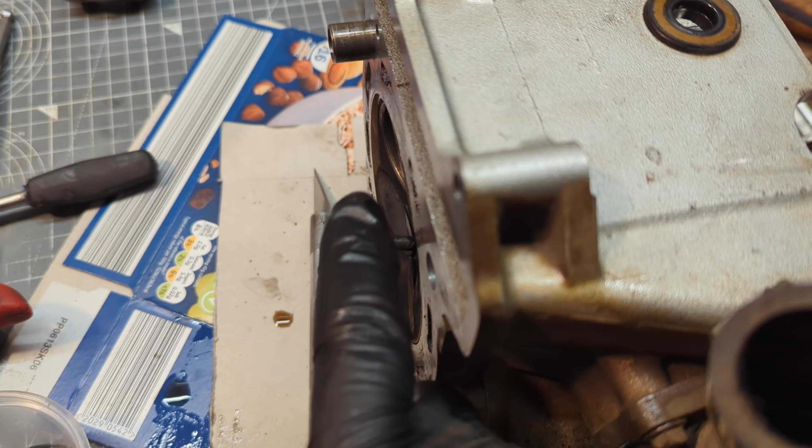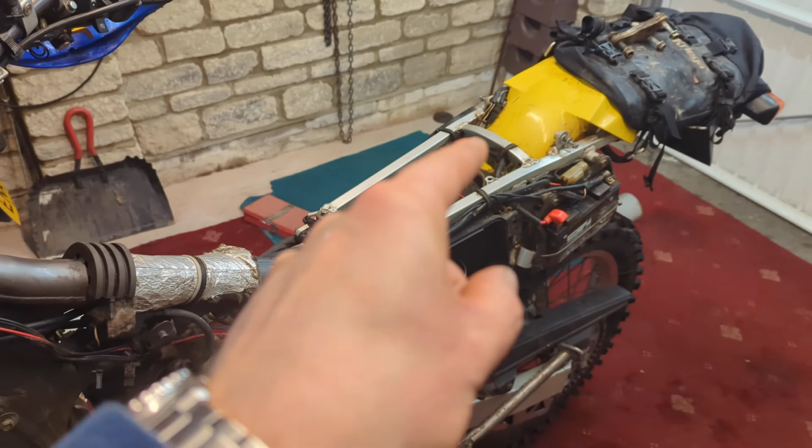I've started to be able to get at the engine. I'll give you a quick show of what I've done. There used to be a seat there, you take that off. There used to be a fuel tank there, you take that off. There used to be a carburettor there, you take that out. You disconnect the throttle cables on the other side.

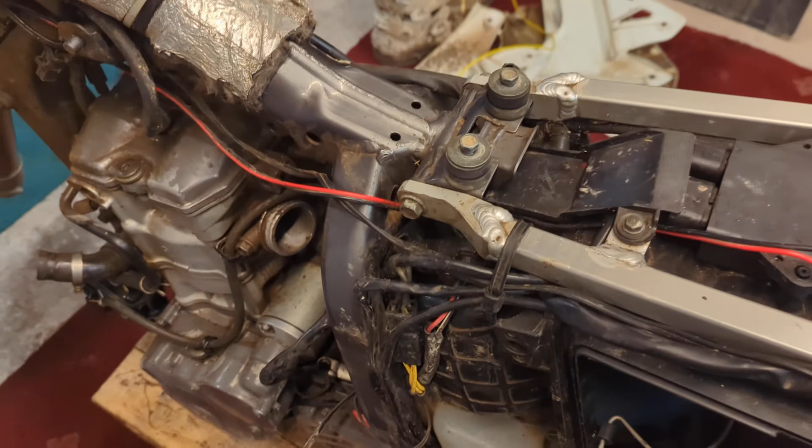There used to be an engine mount here, here and here, and the same the other side. You take that out, and then that goes there. I stamped it with a metal stamp so I know which side is left and which is right. You disconnect a few jobbies, the electrical connectors, the radiator lived there and also there.

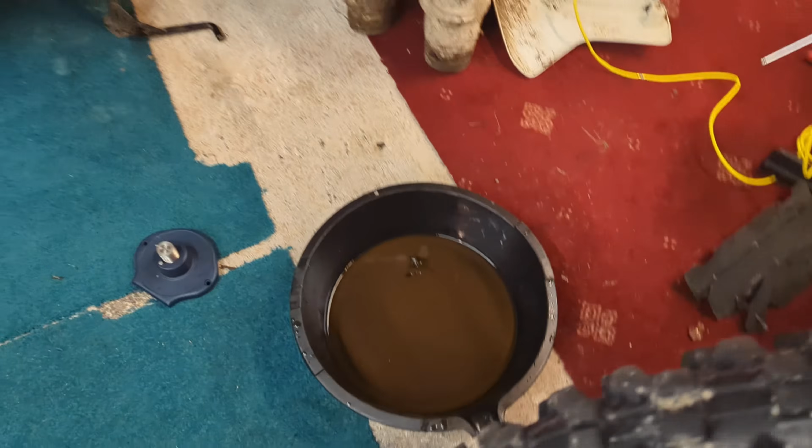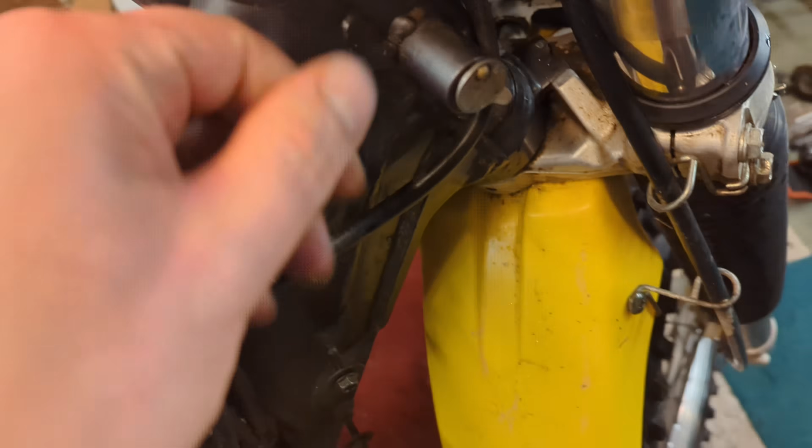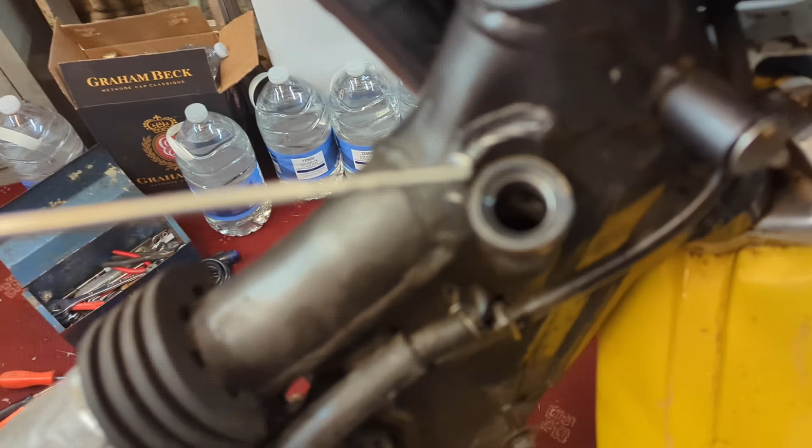First point of concern is that very little coolant came out. I know there are only baby radiators, but that is not much coolant. And then I had a look inside here. This is the oil cap. I know you don't get oil level until it's run up to temperature, but yeah, okay. That looks to me like mayonnaise. I wonder whether it was an enormously catastrophic head gasket.

Just a quick interjection while I'm editing this video. One, there was the right amount of coolant in there. It's only a small pair of radiators and a small amount of space in the engine for coolant, so it was nothing to do with catastrophic head gasket failure. The condensation inside the dipstick tube, again, nothing to worry about. It had been extremely cold and very damp weather, and it's just a symptom of inconstant use and a bit of condensation inside the dipstick tube mixing with a bit of oil vapour.

As I started taking the engine apart, as you'll see with the superimposed photos, it became clear exactly what had happened. It's a really common issue with that DRZ400, particularly that early engine and that automatic cam chain tensioner. The whole story of me fixing it leads up to me rebuilding the top end of the engine and installing a manual cam chain tensioner. So that was very quickly what we found to be the issue, but I was very happy to have a couple of older, more experienced friends to help me.

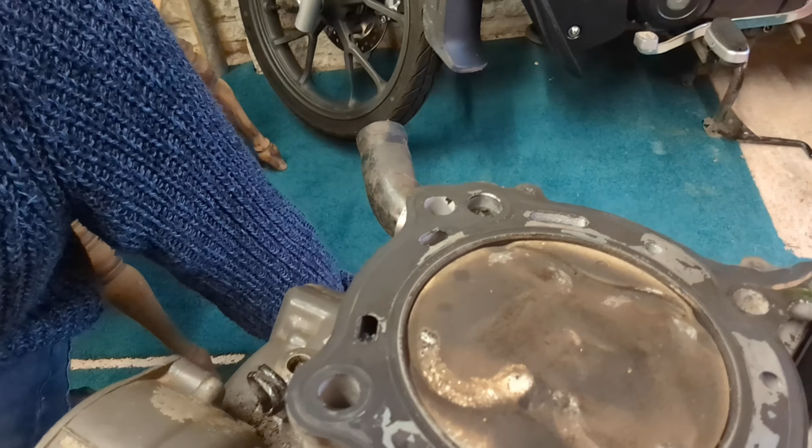On with video. So I've got the engine out, I've got a friend here helping me take it apart. Valves have hit piston, but piston's not dead.

I discovered, with the help of two far more competent older friends, one of whom has built rally engines for a living, the other is just the most talented mechanic.

They both came over, we had tea and coffee and donuts and a chat, and they compared injuries and how much metalwork is in their body.

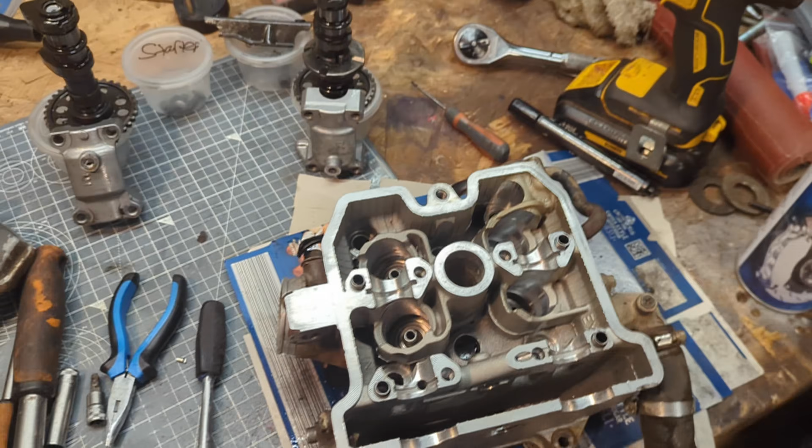But once we got to the bottom of that, they helped me understand what had gone wrong. I can show you just now. So why did the valves bend? The valves, the stems of which live in here. So you've got exhaust side, two valves, and you've got inlet side, two valves. So underneath you'd see the heads of the valves, and they'd be coming up towards us and then closing back down. You can actually see light through there where they were so bent.

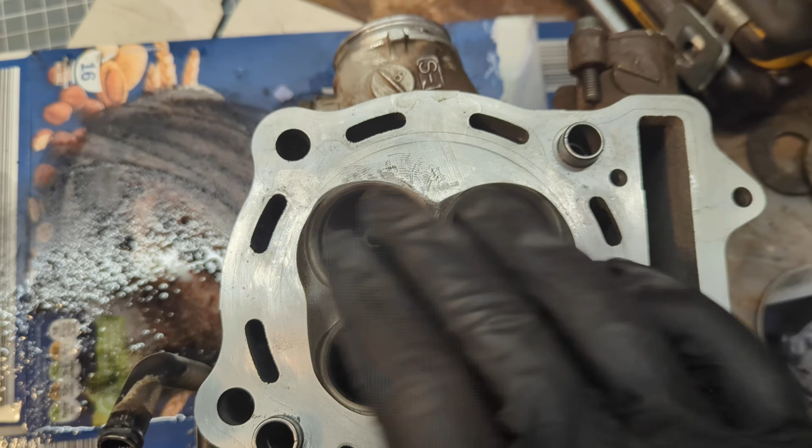So they've hit the piston, and then the force of the piston coming up and the force of the valves being shoved down by the cams has bent them. You can see here, totally unrelated to me, and of course it is a used engine, and much like a pre-loved partner, they come with damage and stuff. I don't know what's happened there, but clearly something's been in the combustion chamber before, not on my watch luckily, but there's a bit of damage.

So where are we? We've got the piston here. You can see the valves have touched it, but it's not cracked it, it's not bent the conrod. The cam chain is fine. Why did a bad thing happen? Basically, the cam chain tensioner failed.

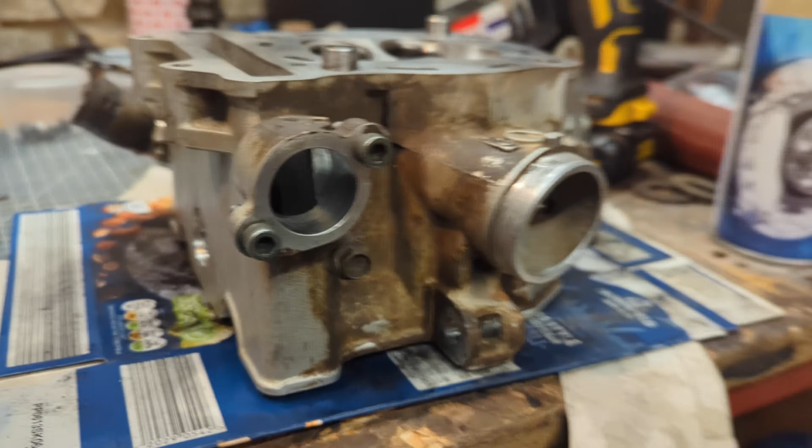I've already thrown it in the bin, but it's basically a sprung roddy sort of thing that pokes through here on a spring, and it presses against a metal piece that puts tension onto the cam chain, which keeps the timing of the engine nice so that the valves open whilst the piston is close but not touching, and obviously if you lose timing then they smack together.

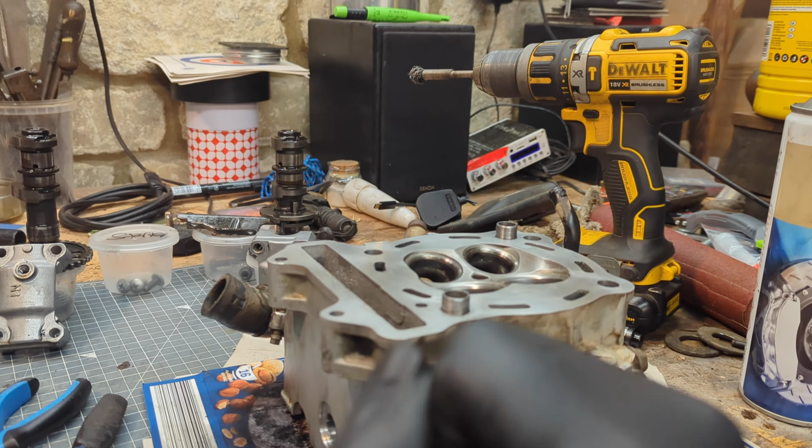So I'm going to turn the camera back round now and I'm going to talk to you about the solution and how much it costs. In looking up problems with the DRZ400 Suzuki engine, I found out the cam chain tensioners can fail. Mine failed. It manifested itself as much louder engine noise, total loss of power, and then like grinding to a halt. So tried to restart it, push, clatter, clatter, clatter, like metal on metal noise. Tried to bump start it, so I probably exaggerated any damage there was, but it's damaged.

And that's okay. Old stuff is allowed to break and you're allowed to learn to fix it. That's part of the fun. It would be a totally different story if this was my only vehicle and it was like critical for me to get to a job or see a loved one or whatever, but luckily it's not.

How much is it going to cost? I need 4 valves, 2 inlet, 2 exhaust, because all 4 are bent. I need valve stem oil seals, I need a gasket set, I need a cam chain tensioner, I need a bit of Loctite gasket sealant. All in, using eBay, Wiseco valves, which are a reputable brand, a reputable gasket kit, but none of it's genuine Suzuki, £150.

And I'm lucky in that I've got friends to help me put it all back together, but I'll sort of talk you through it. And there are much more skilled, better videos than this one. Please don't use this as a guide. Real mechanics put stuff on the internet. I'm just a rank amateur learning for the first time, but you can maybe learn something from my experience.

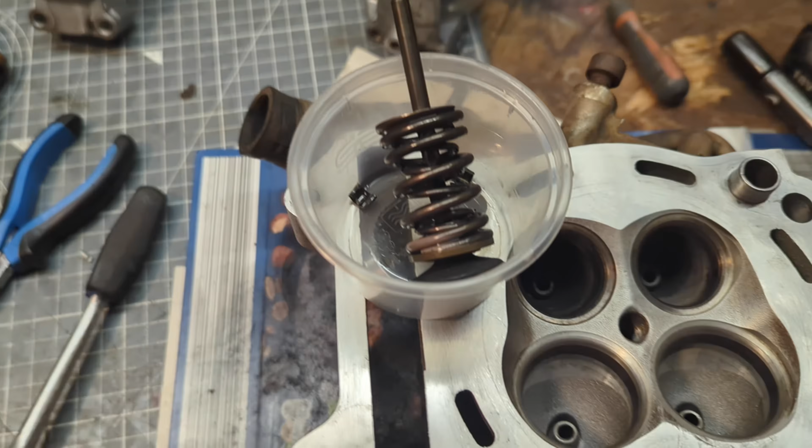How is it going to go back together? I can sort of explain while the bits aren't here, so I'll try that now. So in here is everything you need to basically reseat or put a fresh valve into an engine. So you've got these 2 little guys down here which are called collets, and they're tapered, and they grab the top of the valve there where you can see that groove. You basically press this spring down into the head. I'll turn it over in a second and show you. The collets go either side, so they're like 180 degrees each.

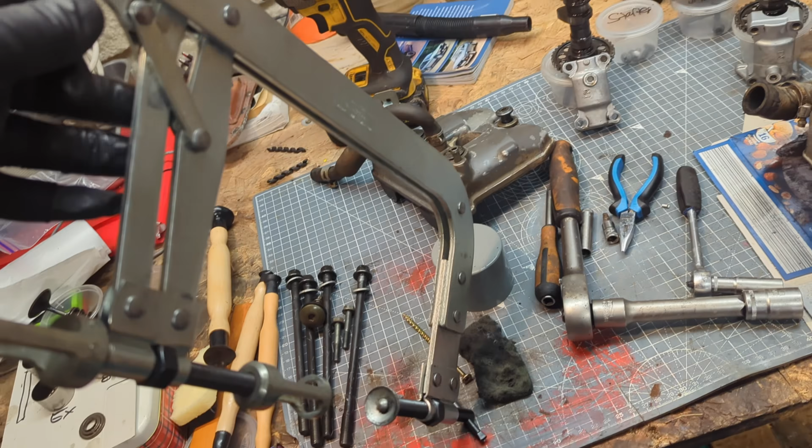The spring is pushed out of the way with a valve spring compressor, which my mate Pete has left me very kindly. So you squash the spring down with this guy, thus, and then you slip the collets either side of the valve stem, and then you let the spring tension back up, and that grabs the valve. Pete said be careful that the collets are properly sat in there and one's not slightly pushed up above the top of the valve, because it will let go and then the valve can drop into the engine, combustion chamber, and blah blah blah.

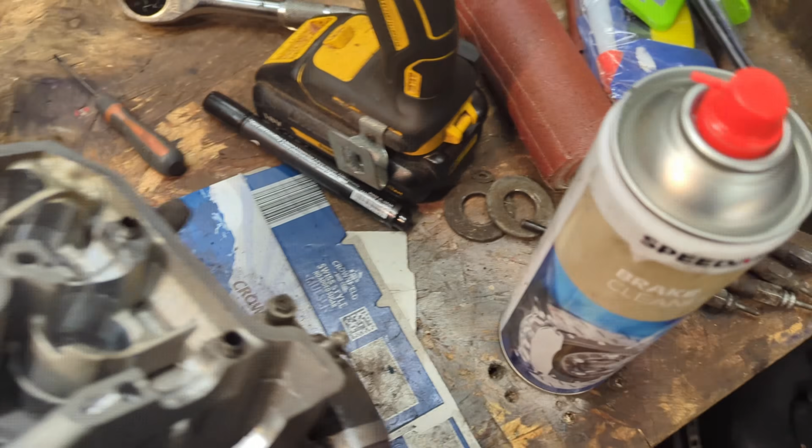So you slide the valve up into there. It comes through here and the stem comes out of here. You slide first of all a valve stem oil seal down that thing and sort of click it on, and they're rubber with sort of metal spring tension bands around them so that they grip on tight, and that stops oil seeping down into the combustion chamber and burning and sooting things up and you losing oil. So then you've got your valve stem oil seal on there.

You put your, let's find it. So the valve is coming up through this hole here. You get your fat spring and your thin spring. So you go thin and fat spring, slide it down over the valve. Then you compress all of that, whoopsie, with your valve spring compressor, clues in the name. And put one collet this side, one collet this side. They clamp onto the valve, they grab it tight, and then lifting the spring back up, putting tension on it, grabs that valve so it can't ever fall down into the combustion chamber.

Then it's simply a case of getting the cams back in, so your inlet this side, exhaust this side, inlet, exhaust. You put these guys on, I don't know what you call them, clamps or something, and then you slot this over the top. The cam chain comes up through here. You put a bolt through there to stop the cam chain dropping down into the bottom of the engine. Even if you do, you just pull it out with a magnet on a stick.

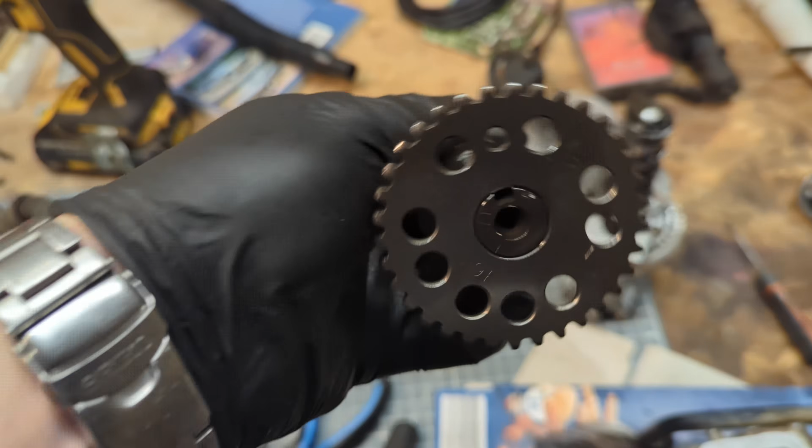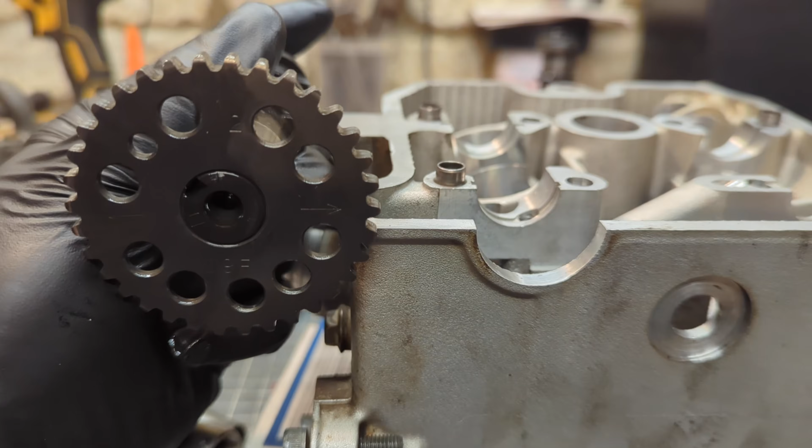And then the timing is important. So you've got numbers on your exhaust cam. So number 1 aligns with the mating face of the head. Number 2 is straight up. And then you basically do exhaust cam first, get the chain sat on that, count 15 links across, get the 15th roller pin to line up with number 2, and then you tension it up and you're there. But I'll explain all that properly when it comes to it.

It is a relatively serious job because the engine is buggered as it stands. It needs new valves. However, both Pete and Jerry said that as engine breakages go, that one's about as kind as it could have been. Valves are much cheaper than cranks and conrods and bearings and pistons and all that sort of thing. So 4 broken valves is sort of okay.

It's suboptimal. And the cam chain tensioner is a cheap part, and that failing is frustrating. I'll probably put a manual cam chain tensioner in, but it is salvageable, and the bike will roll again and live again. So just come along with me and I'll show you what it's like to put it back together. As a layman, I won't necessarily be able to tell you all of the torque settings.

I mean, I've got a manual with them in, but I don't want you to rely on me for all of that. I want you to look it up and learn as you go like I am. But I'm assuring you that it's not as frightening a job as it needs to be, doubly so if you can find someone that will give you a bit of guidance. And if you can't, there are videos on how to do this nicely. I'm just letting you know that even as a layman who's never done it before, you can do it.

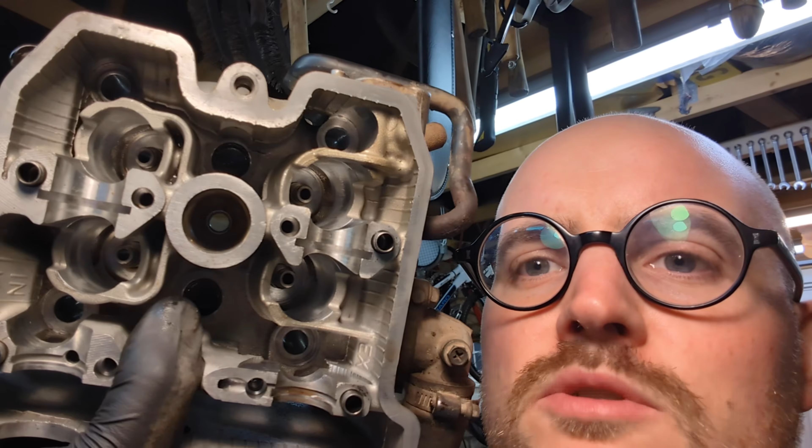Jobs to do before the parts turn up are, and this is for you to do, I've already done them: you want to clean up any surfaces that are going to be squashed back together. So you clean that off, you clean the carbony bits out of the exhaust valve ports. Just clean up all those surfaces and then clean up the mating face there, and then you just wait for the gaskets and valves to turn up. Also Pete, my mate Pete, left me some valve grinding paste.

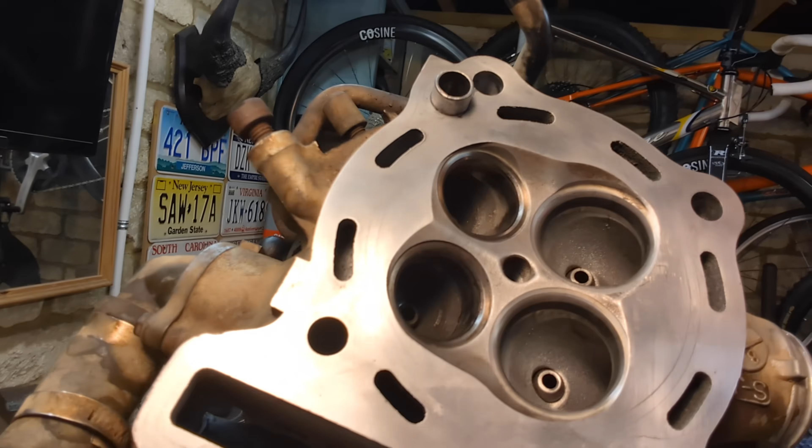Fine on this end, coarse on this end, so it's a double-ended tin, and sucky sticks. So you suck the valve onto the stick and then you sit twiddling it so that the valve makes perfectly sealed friends with the head, and the junction at which they meet is called the seat.

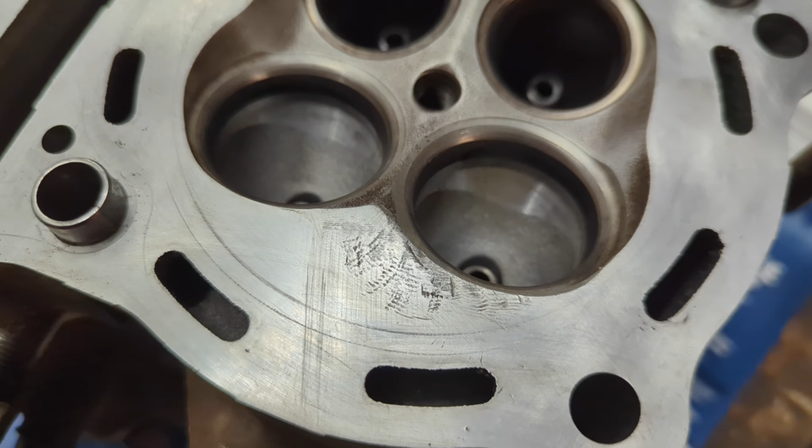So we're on the intake side of the engine. I want you to imagine that you're some air going in. There's obviously been a thing in some of the air that's gone in here before, and the regularity of that pattern suggests screw thread to me, but if it had eaten a whole bolt, surely the whole engine would be mince. So we've got this here, intake side, remember that. And then obviously exhaust comes out this way to the front of the engine, front of the bike.

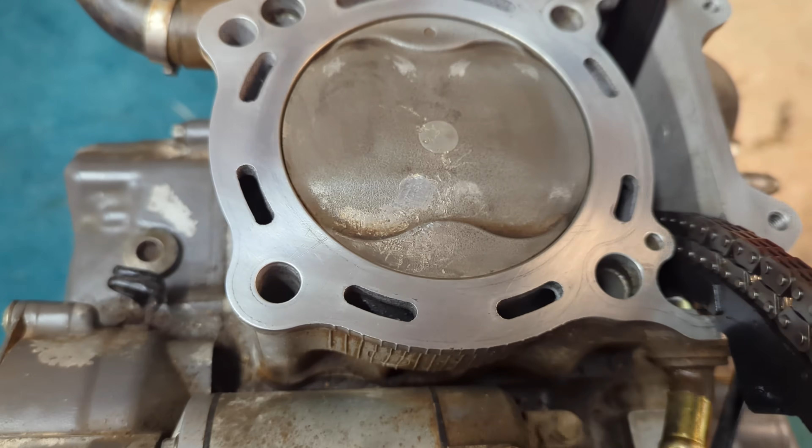It has been eating something one day, but it definitely wasn't what killed it this time, because there was nothing in the cylinder, and the marks only showed up when I cleaned the piston and I cleaned the head off. They were full of carbon and dust and build-up and whatever else. So I don't really know what that was.

Pete and Jerry both said if they're going to break, they'll break here, here, here, and there, and then they might snap around the plug hole, but there's no cracks that I can see. But I reckon it ate a bolt or something, or don't know. It's as clean as a whistle, really, which is good. And just a quick wire brush around there on a drill got most of the carbon out. So we're just waiting on parts now.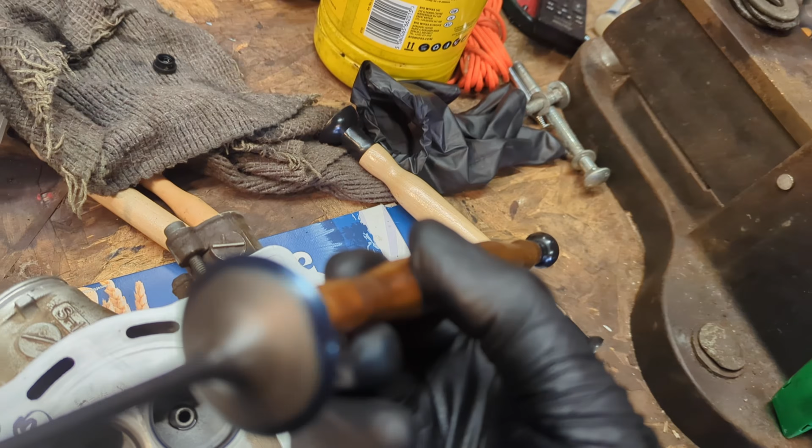I've already done one, and I've used Engineer's Blue or Prussian Blue to make sure that the seal is uniform and big enough. Just a very, very thin layer of Prussian Blue on the underside of the valve. Focus. There we are. And then that should correspond to a uniform line of blue, just when you tap and rub slightly with your stick and valve onto the head.

You can see there's a bit of residual oil down there because you oil the valve stem so that it slides nice and easily, doesn't cause any undue wear. So that, with its blue line matching that blue line, is a good result. 3 more to go. Okay, the mating surface, I wish I had something to point with, here we go. The mating surface is this one here, like the uniform band that the oil is just above and is now drizzling onto.

And on the exhaust valves, I think probably because carbon falls down from the head into the combustion chamber and then gets crammed, there are a couple of pits in this, and you can see there's still one tiny little one just there. I've now covered that in oil so you won't be able to see it, but trust me, it's there.

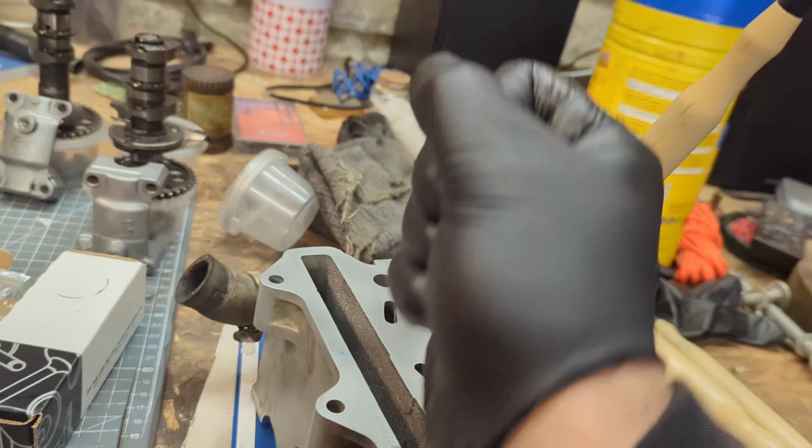So what I'm going to do is coarse one more time, and it's not like you're using a flipping pestle and mortar and really ramming the snot out of it. You just put the coarse on, twizzle this way, twizzle that way, lift up, turn around, like twizzle, lift, twizzle, lift. And it's only like a delicate seal anyway between the stick and the valve, so you can't like mince it, but I'm just going to put a bit more coarse on and then I'll be onto fine and finished.

Okay, so the little pit is just there. You see it? Just there. And you might be thinking, well, if the valve seats were in much worse condition than this when the engine was running, what the hell are you worried about? And I might be worrying unduly about nothing, but I'd feel an utter fool if I didn't do things completely right, or I had the thing apart, put it back together and it was crap, and then had to pull it all apart again just because I was impatient or glib about my valve lapping.

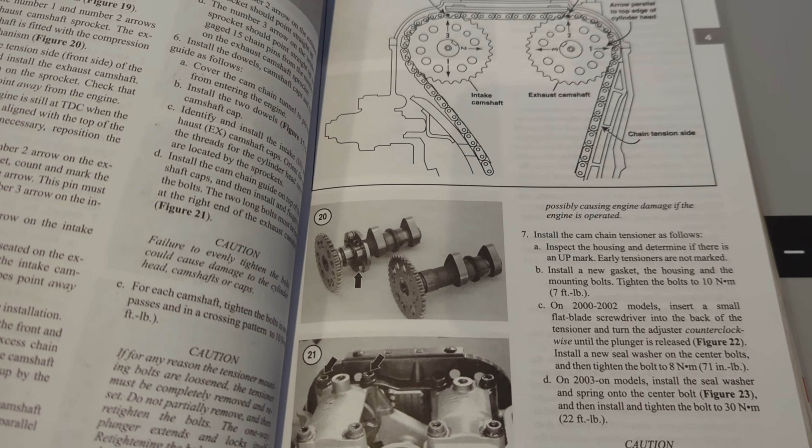So I'm going to do a tiny bit more coarse just to get that last tiny pit out, and then it will be fine on the exhaust valves and we'll be there. Just sitting in the kitchen, and before I go and put the engine back together, I'm going to use this Clymer, someone was struggling with their spelling, but never mind, manual to learn properly, oh, that's a good shot, how to put the old engine back together.

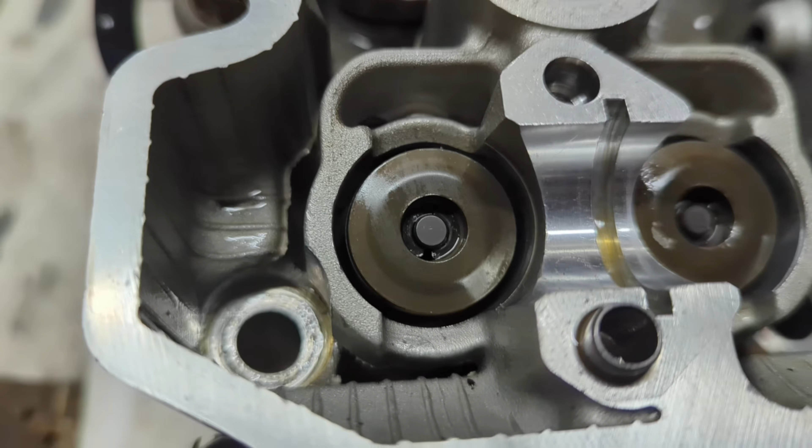Okay, all the valves are back in, and the little, I don't know whether you call them keepers or collets, but there's two, they're semicircular, you can just see them down there, C-shaped things, and they grab into the top of the valve. Here's an old broken one, that machined part there, that sort of shoulder. And it was quite difficult the first time I tried it until I used a tiny bit of grease. You stick the collet to the valve, kind of where it lives, with the valve spring compressed, with this guy.

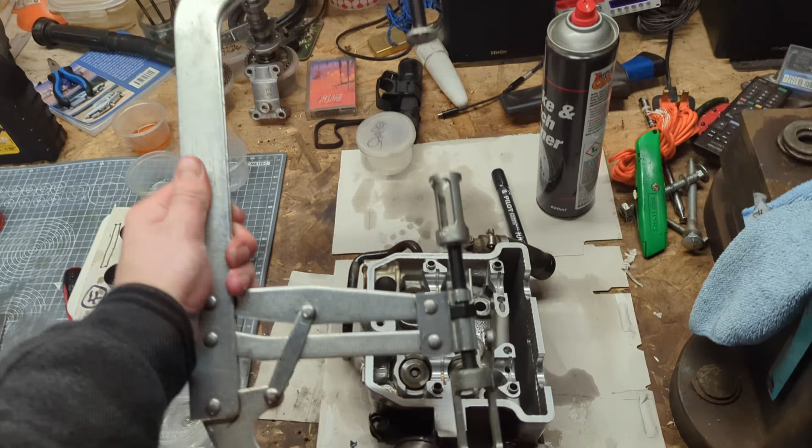So this end is on the springy bit, that end is on the valve. You wind it tight, not so tight you break it. That gives you enough stalk or stem of the valve to stick those little collets to, and then you wind the pressure off and it clamps it on because they're cone shaped, and that means the cap can't fly off and the valves are nicely sprung.

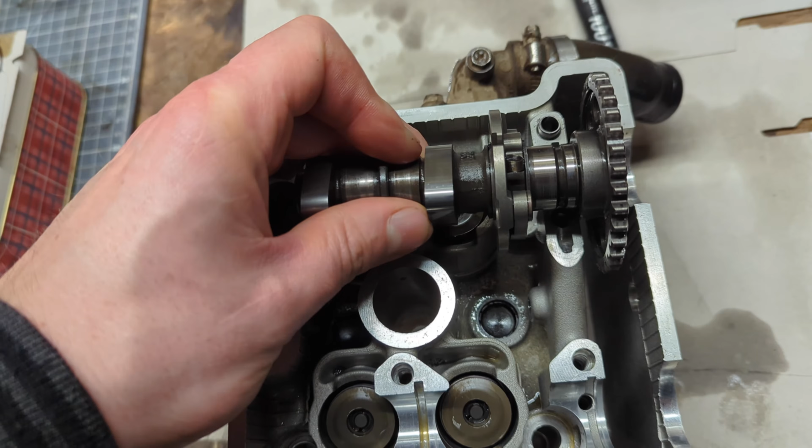Now I'm going to put the cams in. So the wheel goes in the hole. I'm going to oil everything up. I've got a syringe, I've got some fresh oil, so I'm just going to oil everything up like mad, put it all together and then check the clearances.

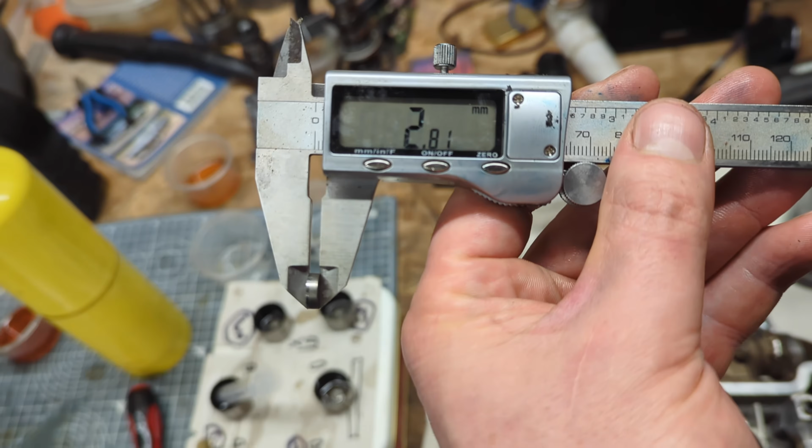Just before you put your buckets back in with the shims, which is what looks like a little watch battery there, measure each one so that if your valve clearances are out, you know what your starting point is and you know whether you need to get a bigger shim or a smaller shim. So this one is 2.81 mil, by 9.48 mil diameter. Okay, so I'm going to measure each one and record it, and that way I know whether I need to go up in size or down in size once I've checked the clearances.

Okay, we're now at a stage where we start timing the head up. So this side you've got 3 pointing up, 2 pointing across, and this side you've got 2 pointing up and 1 pointing across that way. So you've got intake is 3 up, 2 inwards, and then you've got exhaust 2 up, 1 outwards. Now if you look in there, you've got 3 pointing inwards as well. Okay. Another way of getting this broadly correct is if the cam lobes are pointing at 10 and 2, you're broadly there. So I'm going to put it all back on and check my clearances now.

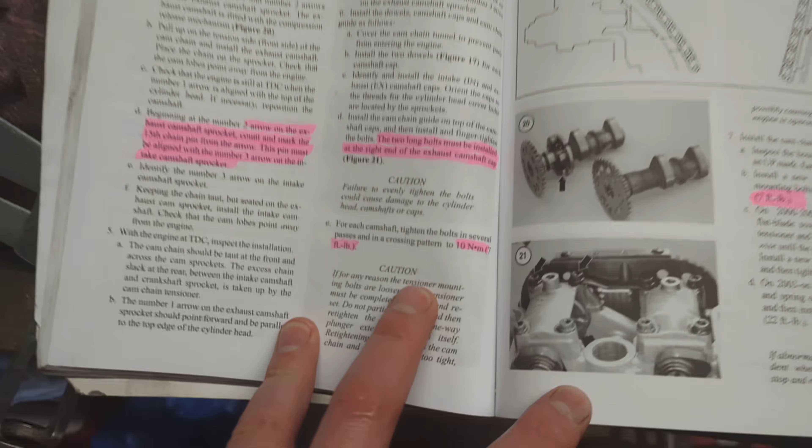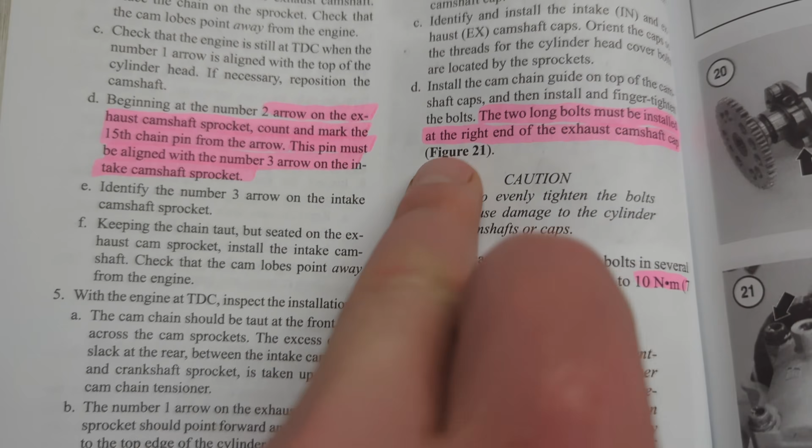When you're installing your cam cap bolts, they're of different lengths, and if you're about to panic and think, ooh, which ones are the 2 long ones? 2 of 8. So the long ones, the 2 long bolts must be installed at the right end of the exhaust camshaft cap. See figure 21. Figure 21 tells us that the cam chain end, which is this end, so let's turn it round so it's making sense.

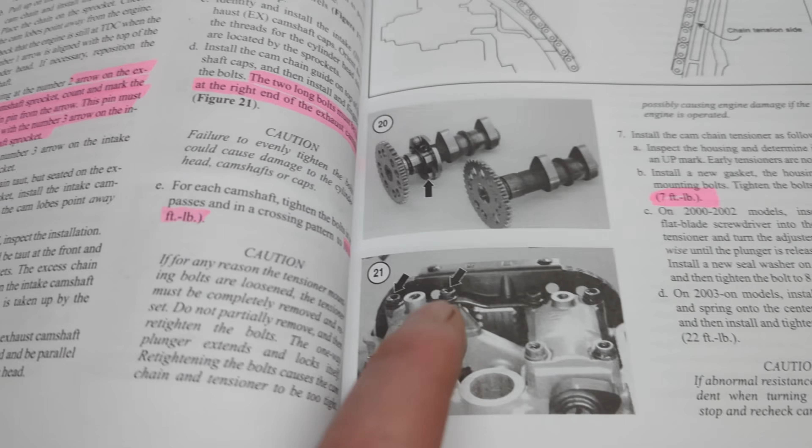It's going to be that one there and that one there. So it's going to be this one here and this one here. The exhaust cam cap bolts closest to the cog. Okay.

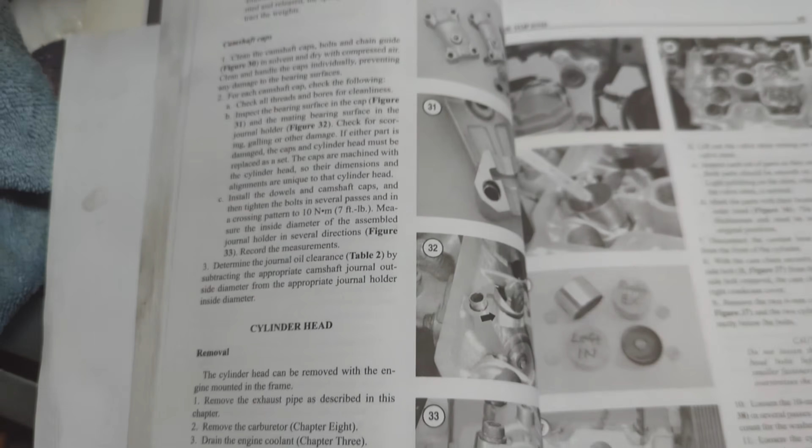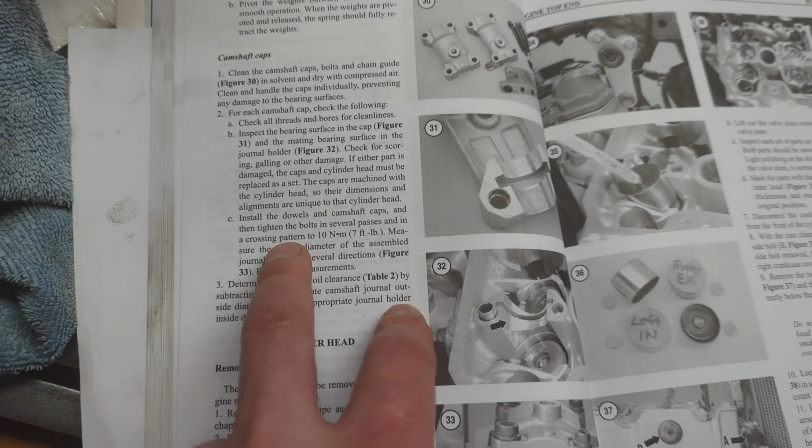Good old Clymer manual to the rescue again. How tight do you have to do the camshaft cap bolts? The answer is 10 Newton meters or 7 foot-pounds, doing it in a crossing pattern in several passes. So if you do that one, then that one, then that one, then that one, then you get the idea.

And then just like that, it was fixed. Except it wasn't. The little watch battery shims that I needed, I couldn't really find in many places. So I asked loads of people, and 2 were possibly coming up with the winning result. One was JHS Racing, which is between Bath and Bristol in Keynsham. 44 Teeth do a lot of stuff with them. And the other was Steve Marsh, who you can see drinking in the British Lion sometimes. Both of them managed to find the shims. JHS found them sooner, so I paid them £13 worth of biscuits and got 4 little watch battery shims.

Knocked it all together. Did the trick where you slide the feeler gauges underneath the cam lobe to check the clearances. The clearances were perfect. I've recorded them all so I can check whether they're growing as the engine wears in. And then it was just putting it back together.

Best tricks I've got for putting it back together are that each of the electrical connectors are a different shape, so you can't stuff that up. And also, unless you live in a hot country, get a hot air gun and heat up the plastic thing that the carb slots onto. You'll save yourself hours of wrestling with cold hard plastic. And then you simply put it back together.